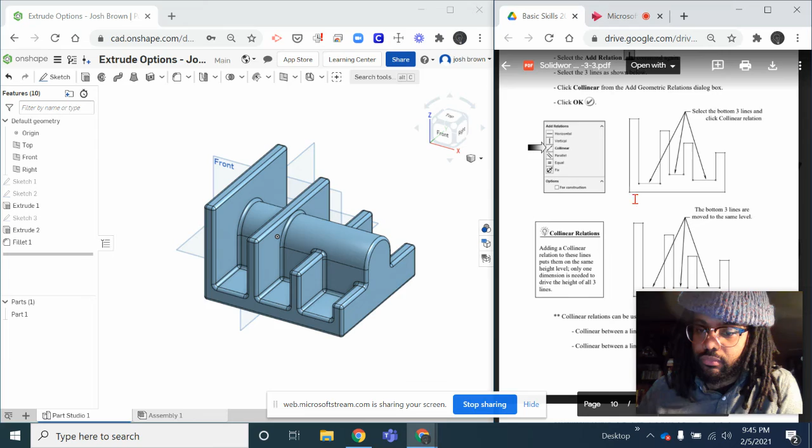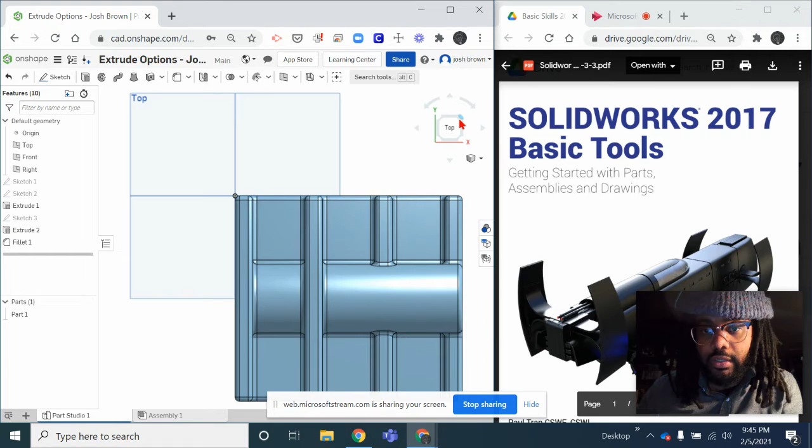So for today, I'm going to walk you through this first model. This is Extrude Options, your final model. I can show you the front view, isometric view, right view, back to isometric view, and the top view. This is the model of the extrude exercise you'll be doing. And if you're wondering about this smoothed out part, that's called a fillet.

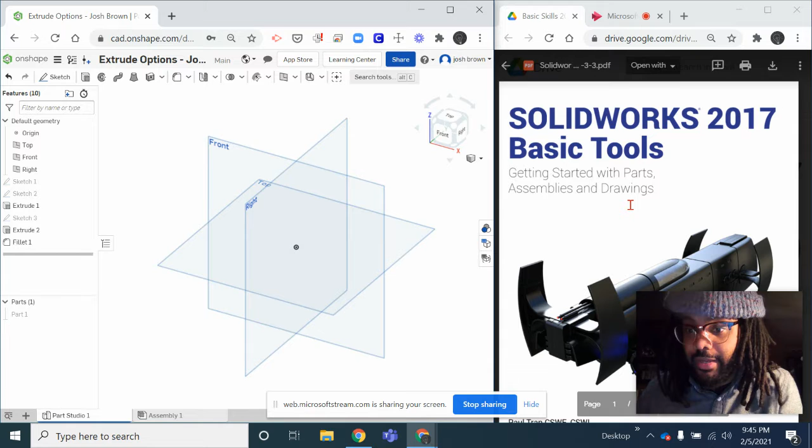I'm going to go ahead and hide this model, and I'll show you, fun fact, this is how you hide something, the steps. Now I was able to find the book, so instead of my screenshots, you can see actual pages showing the first assignment, chapter 3, the extrude options. We're going to jump right into it.

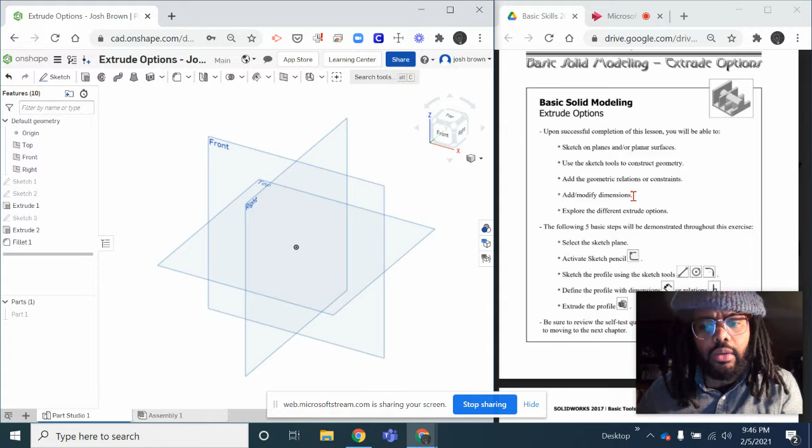Usually you can read through the book and I'll walk you through step by step. I like jumping down to where we go right to the plane. It's going to ask you to start on the front plane, so that's what we're going to do.

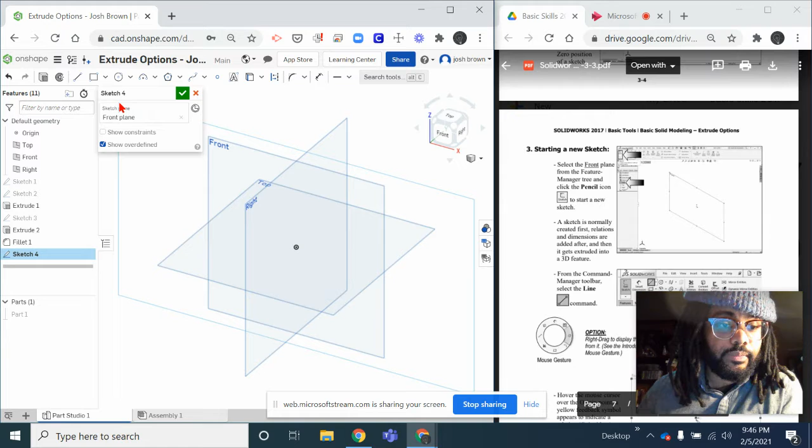We're going to click sketch, then click front plane, then click front view. I'll do that one more time for you guys. We click sketch, and that's what pulls this up right here. Remember, if you do not see this, you're not in the sketch—you need to see a sketch box.

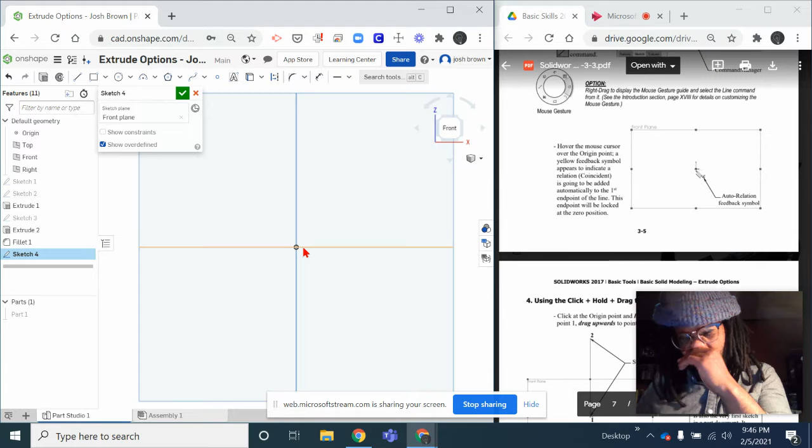I'm going to click sketch. There's my sketch box. I'm going to click front plane, and then click front view. Good to go. We're always going to start at our origin, because it's a center point and it's not going anywhere—it's a way to anchor down our sketch.

Again, we're still in the sketch. Now I'm going to use line. I'll click line right here. Remember, anytime you can't find anything, you can go to the search bar and type in line.

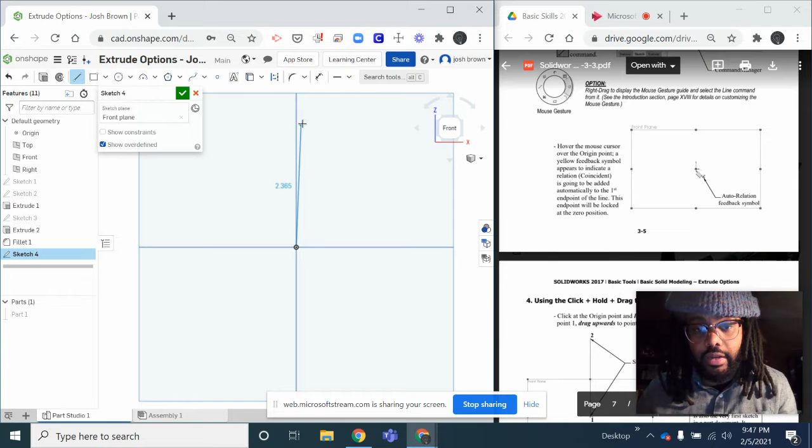I'm going to click line onto my origin, and it's going to ask me to draw a line straight up. There are two ways to do this. I can click once, move my mouse up, and click again—and I already have a line, even if I didn't click it all the way. Or I can click the line and click and drag the mouse all the way up. Those are your two options.

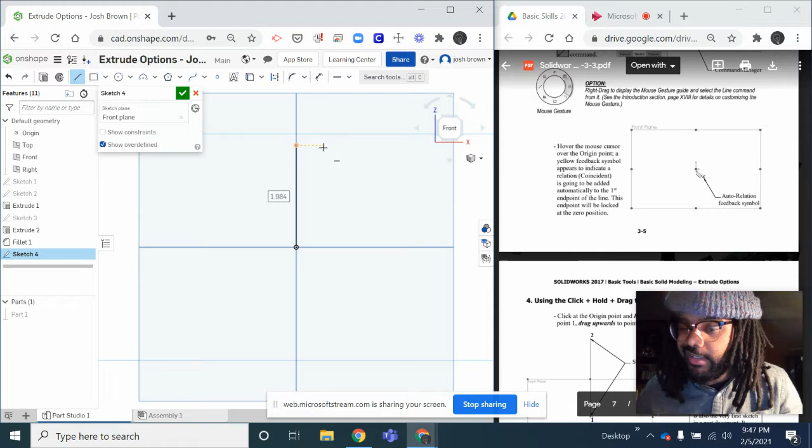I like to just click because it makes it very easy to sketch and keep it moving. So we're actually going to sketch out this whole piece right here. We're on page 6, and we're just going to try to make it look as close as possible. I'm going to start here, clicking, click again, click again, click again, and we're just going to try to recreate this piece.

Now we have this line. Over here, they're not level—we're going to skip some steps and make them level. We can do that with the help of OnShape. OnShape will glow yellow when something's lined up, because it's trying to help you out. So we're going to line all of these up. The columns are going to be uneven, but the base of those columns we're going to make the same.

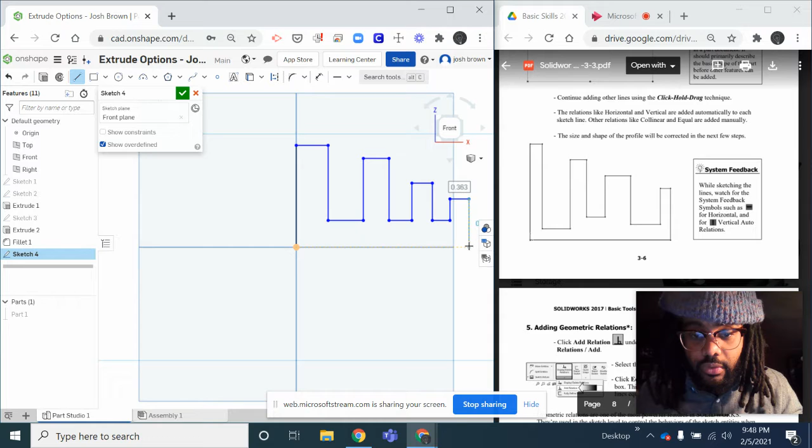So let's keep clicking through, adding columns. We have 4 columns. Up here we go again—boom, it snaps at yellow. Click there. We're going to add one more short column here, and we're not matching up here. We're going to go all the way down to finish up the part—it's still going to match up with the origin. You see it glowing yellow. I'm going to click and bring it all the way back to the origin.

Now we can see this turns gray. Why does it turn gray? It's a closed sketch. I can press escape and I'm back to my mouse. It's a closed sketch, so we're good. We skipped a couple steps, and another way we can do that is by adding a relationship, making sure these stay perpendicular.

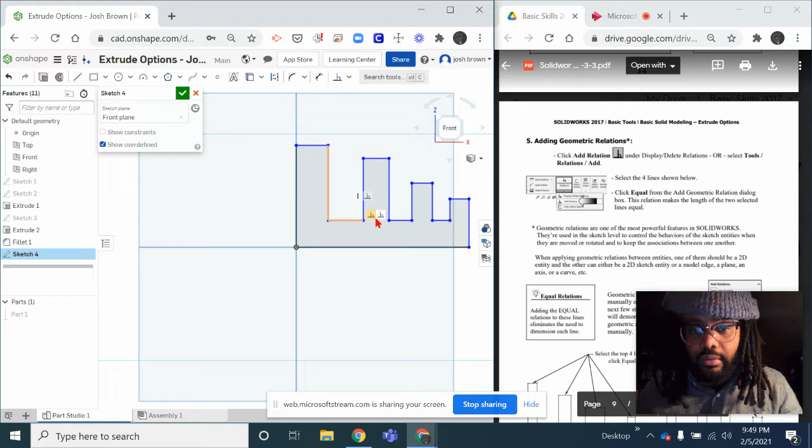You can see the relationships pop up here. It's already perpendicular because we matched them up, and these are all collinear—they're on the same line. You see the relationships? We can always add relationships by clicking two lines, adding the relationship we want, making it perpendicular. You see that it already is, so we're good.

I'm going to keep going. At any point, if I'm going too fast, feel free to start it over. It's a great way to hear the directions and just make sure you didn't miss anything.

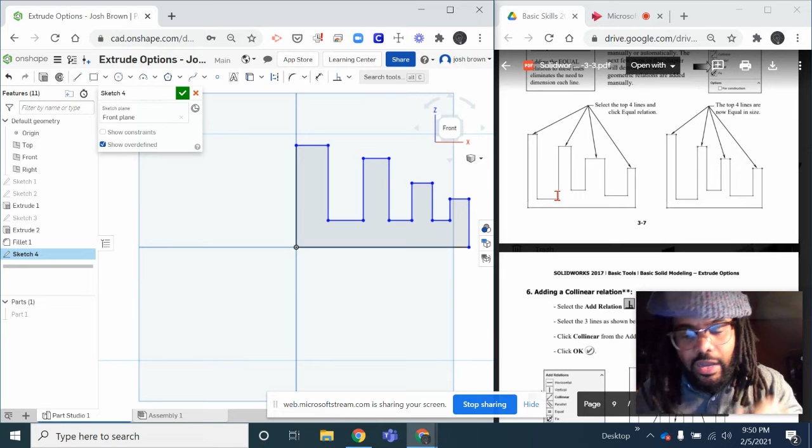Same thing, we can have a natural progression of these lines and make them into a relationship. However, for this practice, what we're going to do is add dimensions.

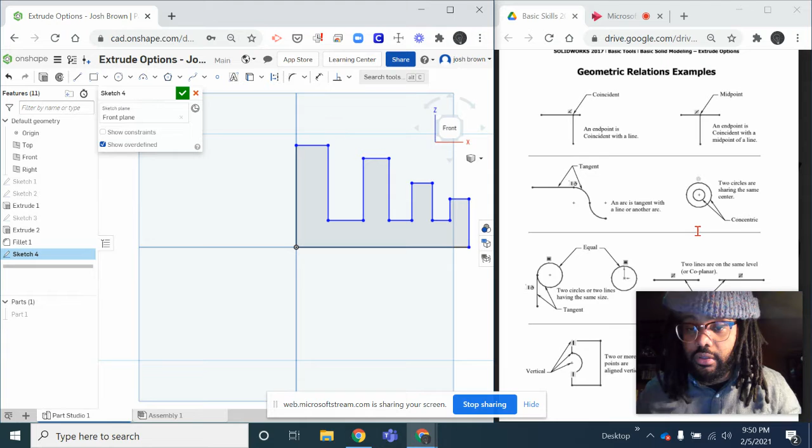Different geometric relationships you see can be coincident, where it's a point on a line. There can be a midpoint, where you're finding the midpoint of a line. They can be tangent, meaning right on the cusp of the curve. They can be concentric, where it's a circle and a circle. It can be collinear, where the lines are parallel along the same line of each other. They can be equal, where you're making both things equal, or they can be vertical or horizontal, which is just the relationship of those lines.

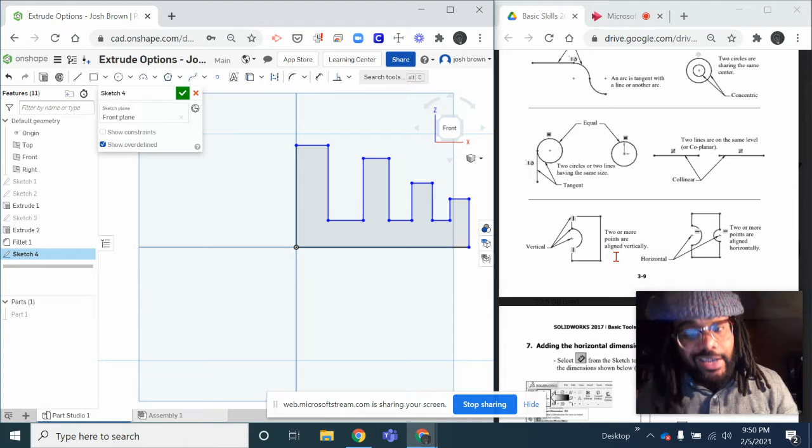I'm not going to ask you to remember all of those. I think it's good to hear them as we keep going and start using these terms. Okay, now the fun part, we get to add dimensions.

We're going to start with these dimensions first, understanding that each one of these columns is 0.5. Now I'm going to show you a shortcut as well. Let's click dimensions. If you can't find dimensions, click D. I'm going to click this line here and pull it up to the side. You want your dimensions on the side so you can see them clearly.

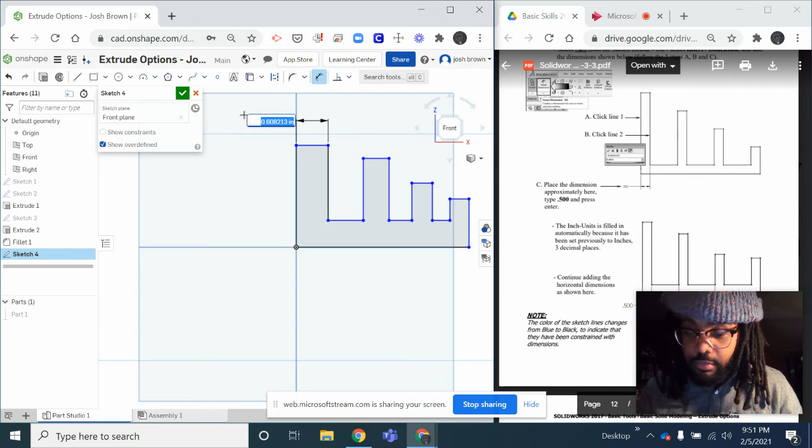This is going to be 0.5. Press enter. Now the whole thing changed, but that's only because it's thinking you want it to stay the same, right? But we don't want that. So it's okay if your whole sketch changes, it's not wrong. It's Onshape thinking it's helping you.

Now what we can do is let Onshape know that's not what I want. See, look, I'm still in the dimensions. If this happens to you, press escape. At any time, if you want to get back to the mouse, I know my mouse is bright red, if I'm on an X and don't want it anymore, I can just press escape.

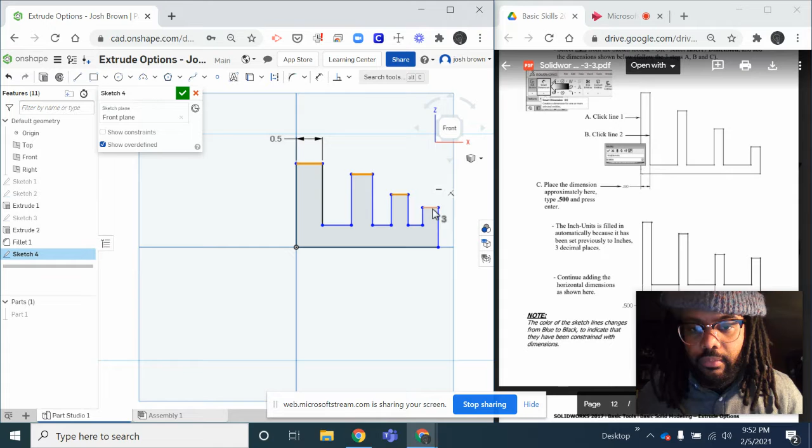Now I'm going to select all the top parts of my columns. How I can shortcut making dimensions is by making all of these equal. If I click here, right next to the search bar, I can come down to equal. Once I click equal, all of those now have the same dimension. You can see they're equal.

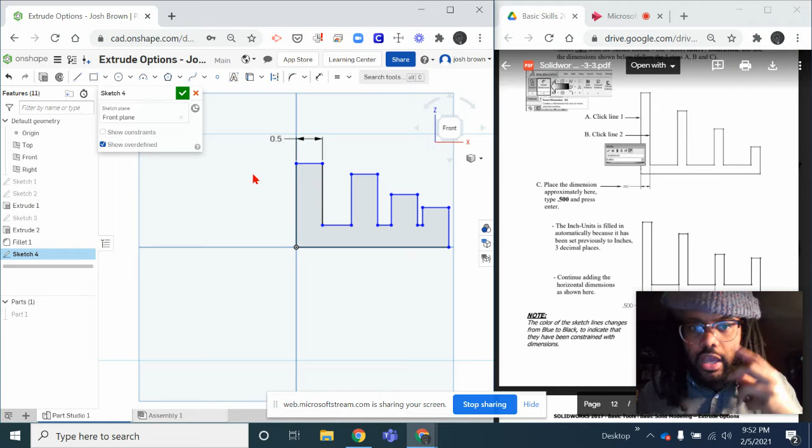I'm going to show you some shortcuts now. I know I had you do it the long way, but now that we're here, you can understand how to use the shortcuts and add relationships. Now I'm going to go through adding these dimensions. There's no shortcuts for these dimensions, but I'm going to show you a way to help understand better how to add them.

If I click dimension, let's say I was to add the dimension here. We already have 0.5. We're going to add this 2 right here. The best way I do that is by clicking this first line, clicking this third line, and coming down to the bottom. I move it all the way to the left. Once I click, I'm going to type 2 and press enter.

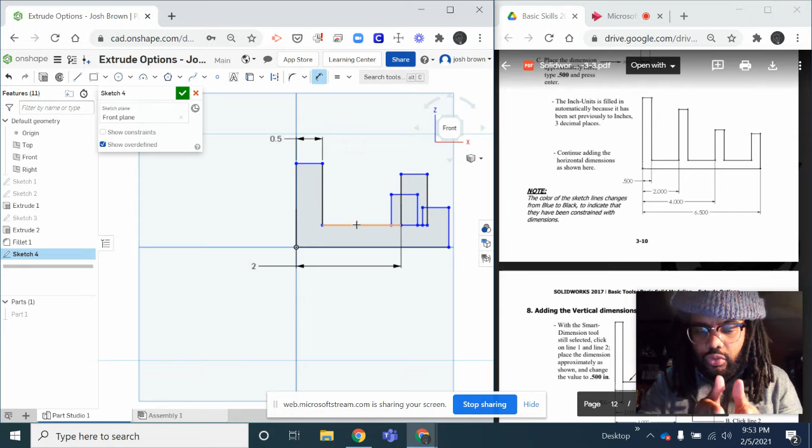Now this is getting a little cluttered, right? This has happened to a couple of you. I know you guys kind of freaked out, deleted the whole thing, and started over. It's not an issue. What's happening is when you're adding dimensions, we sketched it a little small, so now all the lines are in front of each other.

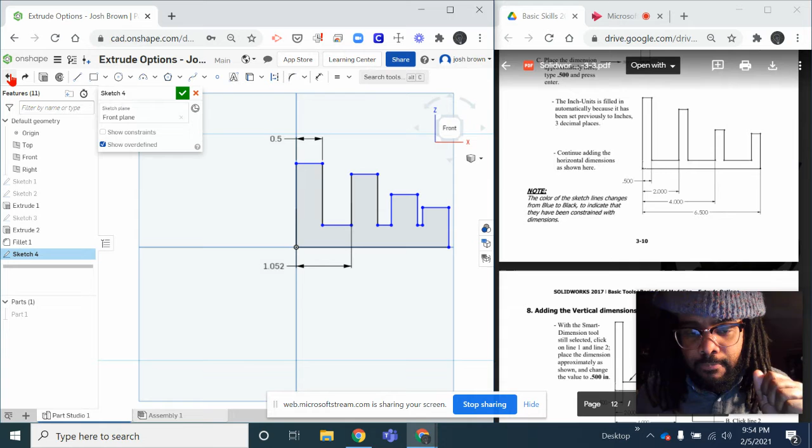This is what I advise: let's undo this. We can undo by pressing Control Z. That's us undoing it. There's also a way to undo with these arrows, right? These are the undo arrows. This is me redoing it, and this is me undoing it. Okay, let's not add that dimension there. It's for a reason.

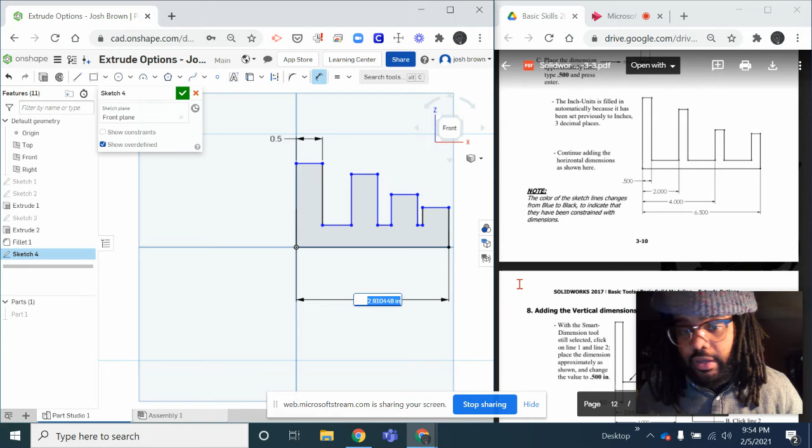Don't worry, let's instead add the longest dimension so we can make sure we understand how big this is. Let's click dimension, click the first line, click the last line, and with that you're going to add the largest dimension, which is 6.5. We're going to type in 6.5 and press enter. Now you'll see the sketch is off the screen.

It's not an issue. If there's ever a sketch off the screen, you just want to click front. If I click the view, it'll resize and reposition it. You also can zoom out on your trackpad, which you've got to get used to, or you can zoom out if you have a mouse. I advise you to get a mouse—I might actually be able to get some for you guys. Click front view, now we've changed our view.

Let's go ahead and add the other dimensions. We're going to click the front view, or excuse me, the front line, front view. Click the front line, still doing dimensions.

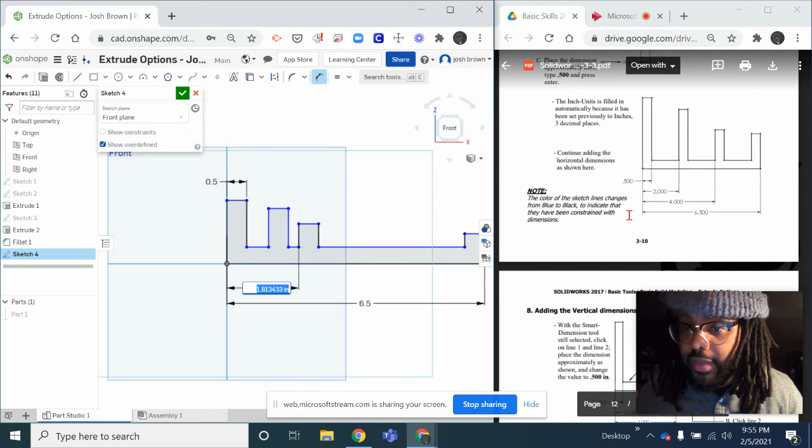Now we're going to click the fourth line here. I'm going to click, and that's going to be 4. So if we click here, we're going to add 4. Okay, last but not least, the second line. Click from the front line, click to the second line, and we're going to make that 2. If you look over here, it's 2. Press enter. Good, we're getting somewhere now.

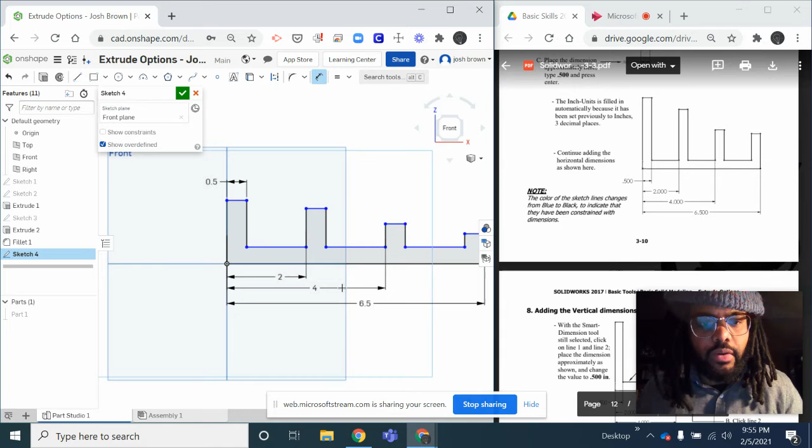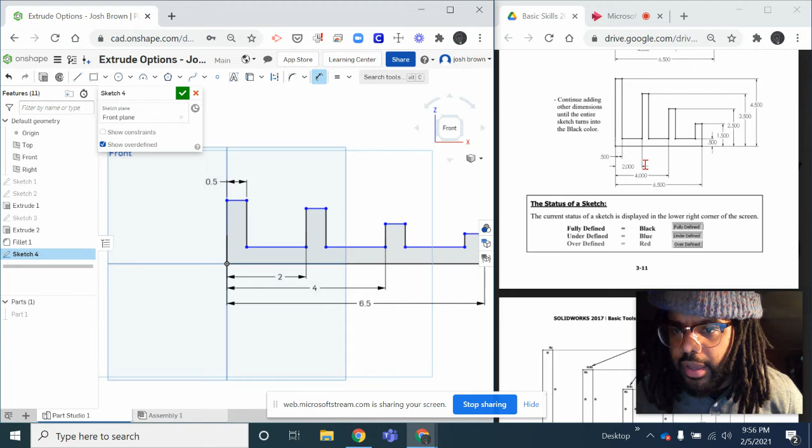Excuse me, not 0.496, it's 0.5. Now that we have the full dimensions of the heights, this height is 0.5. The tallest column is going to be 4.5. The second column is going to be 3.5. The third column is going to be 2.5, and the last column is going to be 1.5.

Same business, we're going to click dimensions, right? We can click the first line, and we'll be able to do the first column at the same time. We're going to type in 4.5. Now we go to the second column. We're still on the dimension, you can tell by the X. If this happens, you want to pull your dimensions down. You don't want your dimensions on top of your model or on top of your sketch, you'll get a little confusing. It'll be a lot easier if you pull them all the way down so they're away from your sketch.

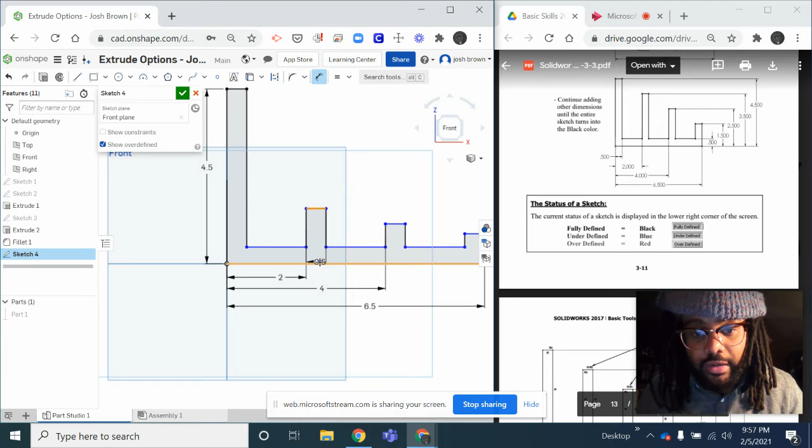Second column, we're still in dimensions. I'm going to click the top of the column. I'm going to click the bottom line. Now I'm able to get the height of that second column, which is 3.5. If you don't remember, you can always look over here, look at the numbers. The next one is going to be 2.5, which is the third column.

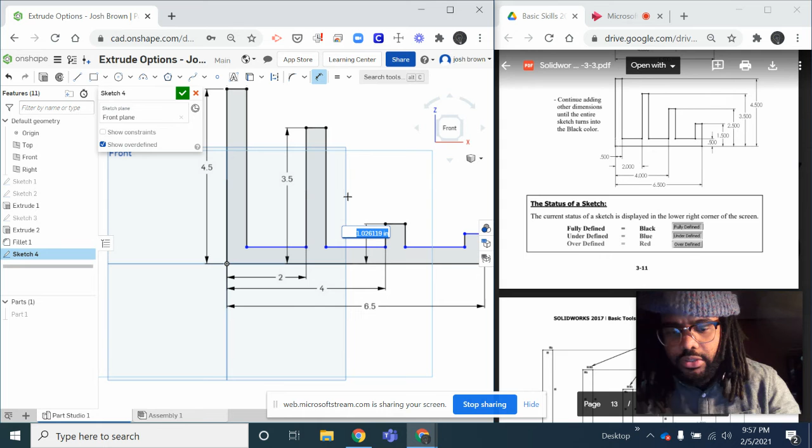I'm still in dimensions. I click the top line, I click the bottom line, and they'll always glow yellow. And I'm going to change that dimension to 2.5. Okay, last but not least, zoom in over here. I'm going to add this dimension, click the top line, click the bottom line, and I'm going to change that one to 1.5. Oh, I lied.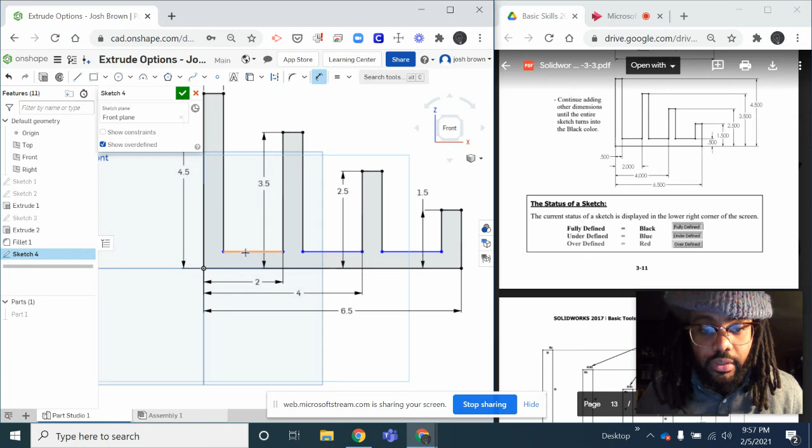One more, it's going to be the actual height of the body, that base part. That's going to be 0.5. Similar to the width here, this is going to be 0.5. Now, because all of these have a relationship, it will all change together. I'm going to click this line, then I'm going to click the bottom line, and now I'm going to drag it down here so you can see it. Then I'm going to make that 0.5. All of them moved, we're in succession.

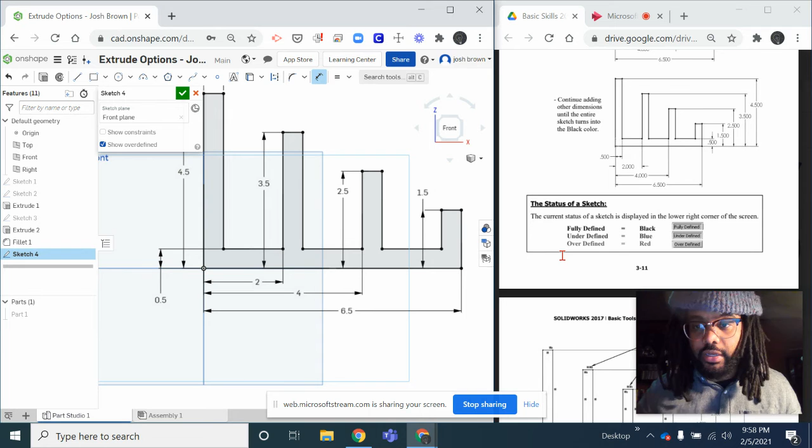Everything looks good. Okay, now if at any point I lost you, you can go back and repeat it. But all of this is right here on page 311.

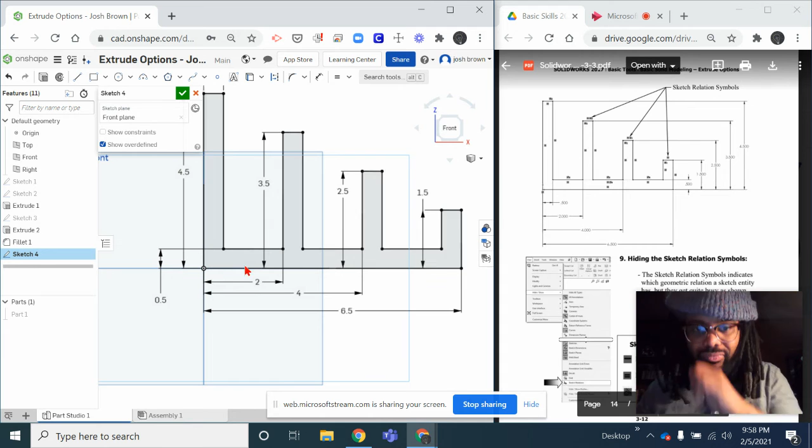All right, get to the fun stuff. Now this is walking you through different sketch relationships. At any time, if you hover your mouse, well, first pressing Escape, we're going to get out of dimensions. If I hover my mouse, I can see the different relationships in this. You've already formed a lot of those relationships. You can add these relationships at any time. However, these relationships can conflict with the dimensions if you already have those in place.

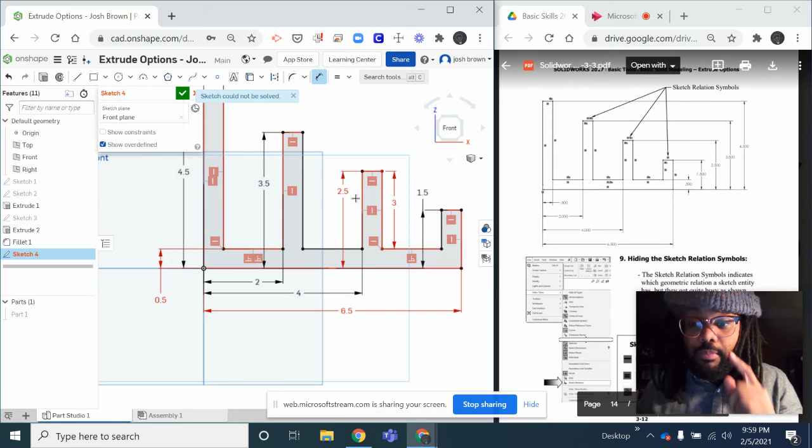Sometimes you might get something turns red, that's when you have too many dimensions. And if that happens, you can just undo. So if I have dimensions here already, and I start adding a dimension next to this, and I try to change that dimension, it all turns red. Why? Because these dimensions are conflicting. If you ever see this, don't freak out, it just means that you have too many dimensions. Some of them aren't making sense. And the best thing you can do is go right to the top left, click that undo button, and remove the dimension.

If you really get lost, take a screenshot and I can help you out.

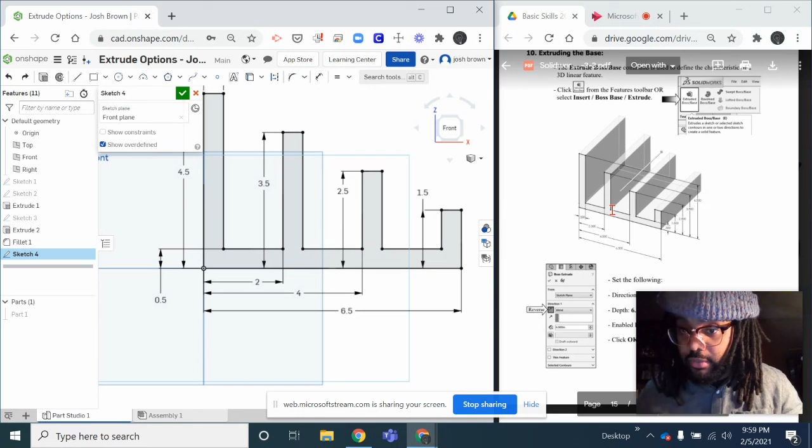Now our next step is to extrude. We're going to extrude this sketch. Remember, 2D to 3-dimensional, we're going to extrude this by 6 inches. So let's go to extrude. If you see this, you're still in the sketch. You're good, click extrude. I like changing this to isometric so I can see it on the perspective. This is asking me to extrude blind.